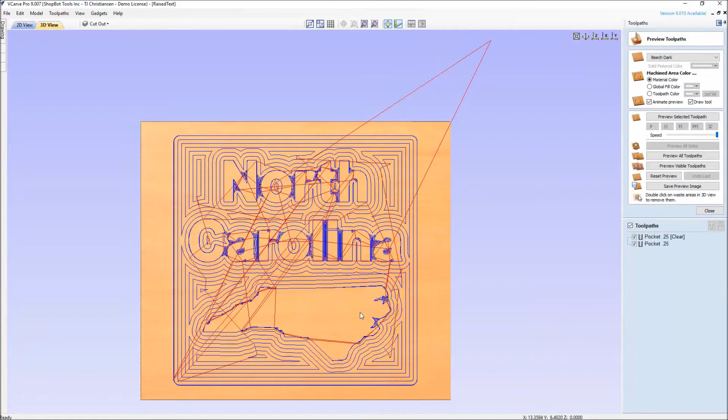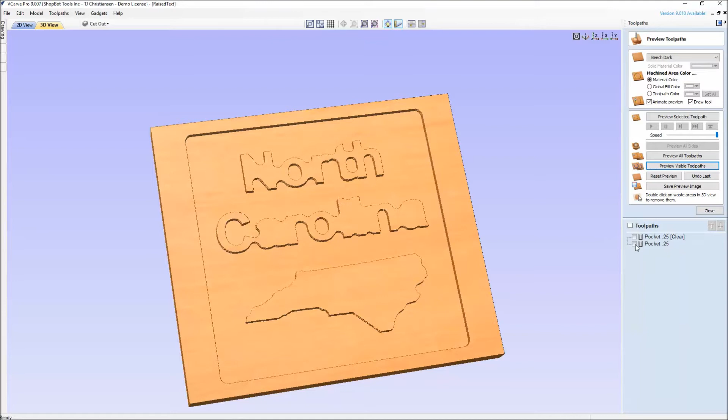0.25, so I know how deep it is. When I hit calculate and go into the preview, I can see there are 2 toolpaths generated. One is the clearance tool - if I turn that on and run it, you can see that big 1/2 inch bit will go and clean all these large areas out, staying outside the finished detail. Then when you put in your smaller 1/8 inch bit and do your bit change, that's what goes in there and gets where that 1/2 inch bit couldn't fit, getting you the detail.

So let's take a look at this out on the ShopBot. Here we can see the type of hold down I was talking about, where I use the table saw and put a line around my blank, offset it by 2 inches, and just use whatever scrap material. These are just some fender washers to hold it down.

We'll revisit that later, but notice I put an X on the blank because I'm going to do bit changes. Not only is there an X on the blank, but there's also an X on the Z0 plate. So when I do the bit changes, I come back and zero in the same spot of the same material with the same part of the Z0 plate, which helps get rid of any discrepancies.

So here we are moving along with our 1/2 inch bit, which is going to auger out the material first. Remember, the 1/2 inch bit using the Vectric software stays away from the finished edge of the state of North Carolina, stays away from the finished edge of the text, and it's just working its way through here.

So what we can see here is it picked up, it's moved over, and it's still working its way through the cut. That's what's nice, this large area clearance tool is going around and clearing away the text. Yes, a V-carve would be a faster toolpath for certain types of signs, but with raised text, it's going to take a while to take the bulk of the material away, and that's why that feature is in there, for removing a lot of material first.

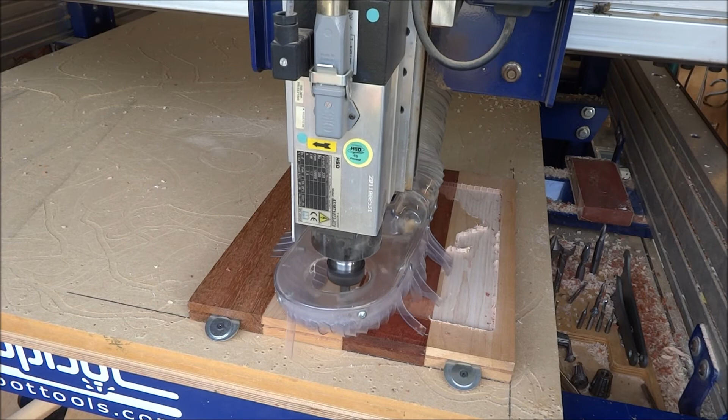As it carves itself out, you can see where I had the dust collector boot off, and I've returned it back on for the remaining part of this video because it does a much better job not throwing dust all over your shop. So it was off there for the first few passes, I put it back on, and then that's going to show you what it does. So it makes its final pass around, doing its cleanup.

And then this is the part where we stop it, and this is where we look at the bit change for the 1/8 inch bit. So here's showing you the size difference between the 1/2 inch and the 1/8 inch. The 1/8 inch is clearly needed to get down in between those letters.

Same X, new bit put in place, zeroing it in the same spot on the Z0 plate. What's nice is since we're using 2 different end mills going to the same depth, by zeroing it in the same spot, I don't have to worry about having a different deviation in cut depth when trying to align the 2 different toolpath depths.

So now that little 1/8 inch bit will get down in between the letters and works itself in there. Again, the dust boot is off in this video so you can see, but that little bit is what goes in and does the detail. The larger clearance tool is what cleared away that big bulk of the material around that. And when this finishes here, we'll go back to the VCarve software to start the next toolpath.

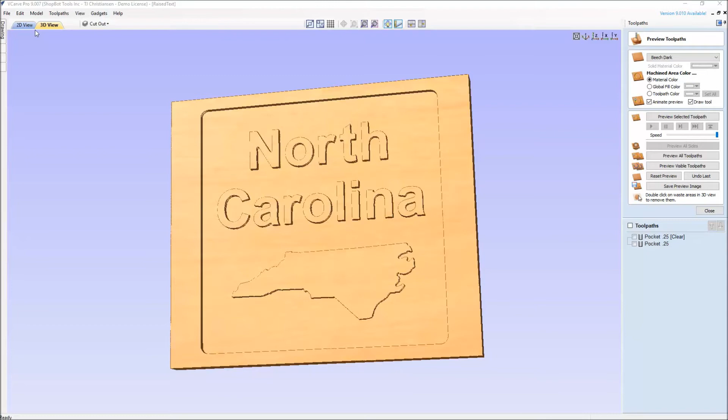Okay, we're back in the software, so we'll click up here to go to 2D view and hit close to come out of preview toolpaths. And here's where we are. Let me zoom out and we're back to setting up.

So we're going to add our V90 next. That V90 is what we're going to use to carve out ShopBot. I also want to put a beveled edge around all of our raised text just so it doesn't have the square corner. So first things first is our VCarve toolpath.

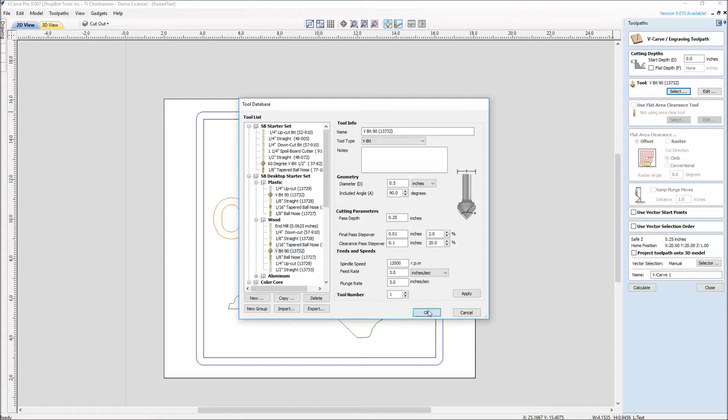We're just going to go in and select a V90 that's out of wood. Again, our settings are just a little bit different between wood and plastic, and you can look at tool database tutorials for that. Here's where you can see the word ShopBot as our visible. It's carved down in place.

And to give our raised text just a little bit of a beveled edge, I choose to go in this time and do a prism toolpath. Instead of a full prism, I'm going to restrict its depth and say, hey, I only want you to go down about 1/8 of an inch. Select the bit - I'm going to use the same bit so I don't have to do a bit change. I'm going to hit calculate.

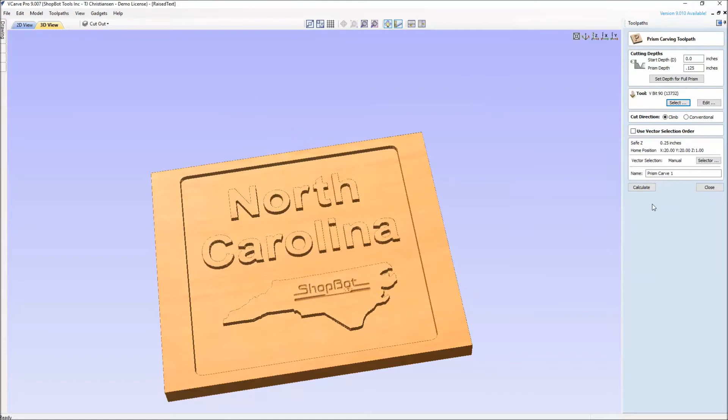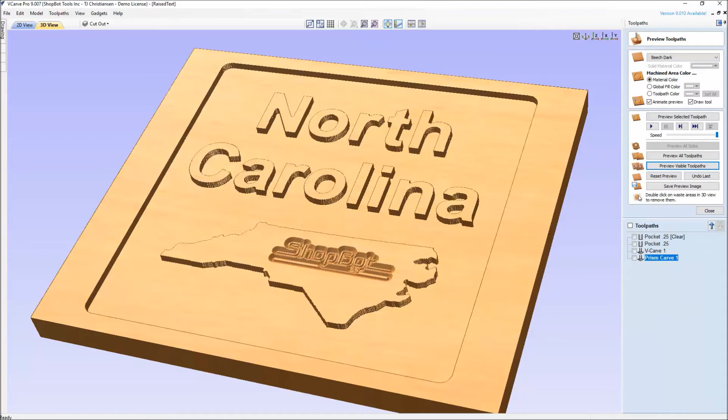And what it's doing here, and this is something that allows us to see, is, oh no, what's going on? Well, what we have here is something that happens to a lot of people when they're getting started. I was trying to do my prism toolpath over here on the word North Carolina, and what happened was, when I started my new toolpath, the vectors that were selected were the same ones from the previous toolpath creation. So instead of going in here and deleting this and starting a new one, what a lot of people overlook is you could just double click on the toolpath that you set up, and instead of that being selected, you grab the vectors that you want to work with.

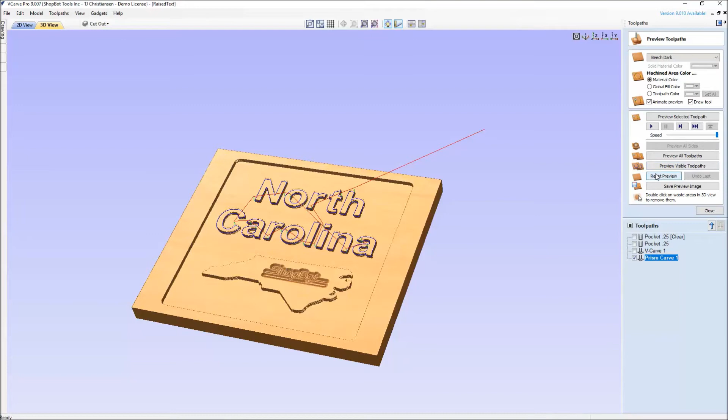And then when you hit calculate, it's pretty much asking us that we're not reaching full prism toolpath, and do you want to continue, which is what we do. We don't need to see this anymore, so we would reset the preview, and then we can preview all the toolpaths up to this point, and that shows us what this looks like having that depth. So it's a raised text, and using the prism toolpath, you don't have to go in and do any offsetting. It figures this out for you, puts a nice beveled edge on there.

And if I wanted that beveled edge to be on the state of North Carolina as well, again, I don't need to come back in here and create a new prism toolpath.

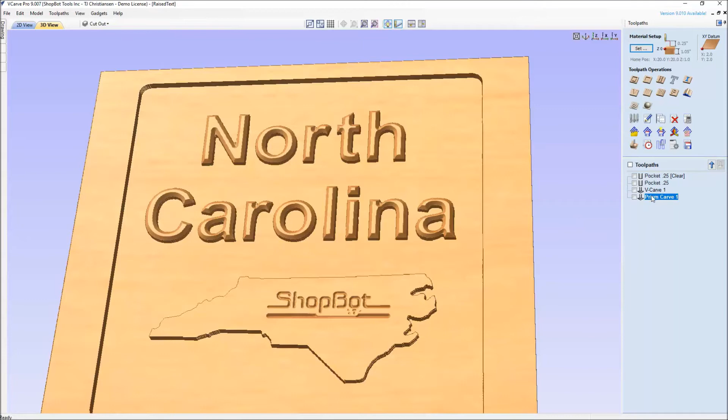If I'm using the same bit, same depth, same parameters, I'm just going to double click on the one I've already created and hold the shift key down and select that. I point this out because a lot of people who come through ShopBot training here in Durham, North Carolina will see Prism 1, Prism 2, Prism 3, because they add separate ones. I like to point out that you can add this all to one, and I'm even going to put in here Prism V90. It can all be done in one toolpath by reselecting and adding the same toolpath instead of having multiple ones, which keeps things cleaner. Again, personal preference—there's no right or wrong, it's what works for you.

So there we've added a beveled edge to our ShopBot state of North Carolina as well as our text. Let's go and look at what the V90 looks like added to our project.

Here we are at our third bit, but we're using the same zero location by using the X we marked on the Z0 plate. What's going to happen is determined by the order of the toolpaths and the way we created and saved them. If we wanted them in the other direction, doing the beveling first, we'd just change that back in the software. Here we're doing the V-carving. The toolpath moves out of the way, comes back in, and starts doing the prism toolpath that we set the V90 to go around at 1/8 of an inch.

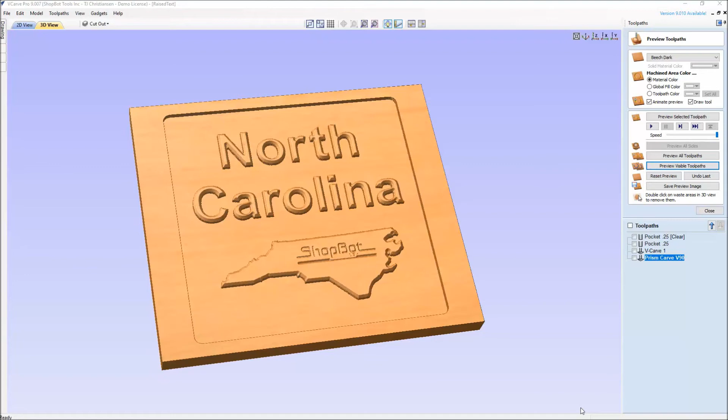Alright, our final toolpath is the cutout. Let me go back to the 2D view and close out of here. Remember, this outer vector in blue was the size we pocketed to, which was larger than our original 12 by 12 square. The reason was so we had it pocketed out past, giving us a flat edge all the way out past our actual cutout. So we want to make sure we grab the 12 by 12 square before we go into our profile.

For this example, I'd like to go by material thickness plus 20 thousandths to go a little bit deeper. That takes it to 1.07. For this one, I use the 3/8 compression bit, and I want to cut on the outside of the line.

Again, going through this, you're just seeing us in this tutorial selecting these different options for those of you just getting started. There are lots of tutorials on our website and through Vectric's website showing the different setups for profile, pocketing, and different toolpaths. But I'm going to walk this one down as outside, climb cut, and I like to add a nice healthy ramp to it, which will ramp itself all the way around in that harder material. I'll call this one the cutout.

When I calculate that, it says no vector selected. So you need to make sure you select not only a vector, but the correct one. Remember, the outside one is where we pocketed, the inside one is our 12 by 12.

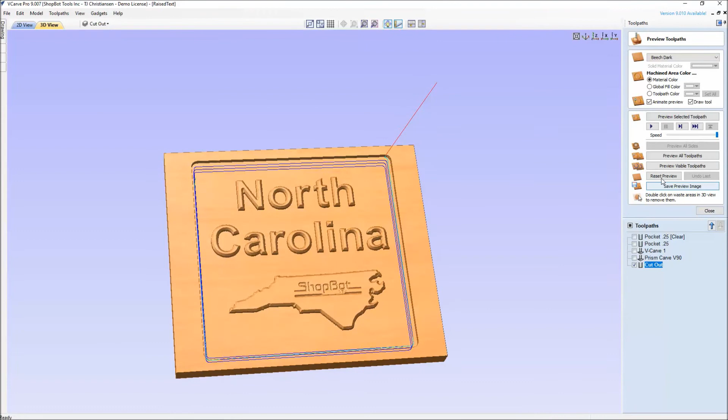When I hit preview here to preview this visible toolpath, I can see that it cut all the way through. If you need to add your tabs, you can go back into your cutout and do that.

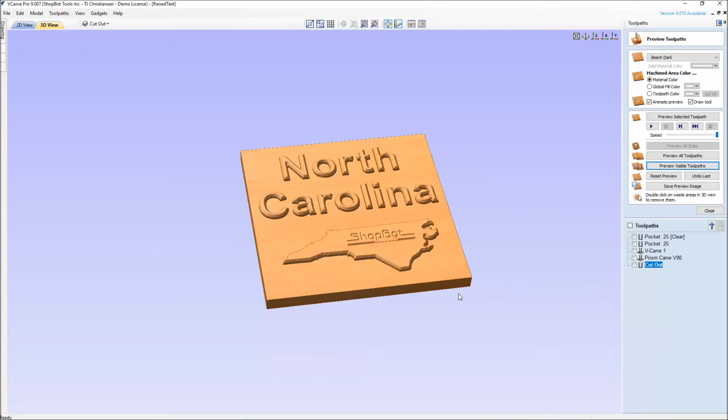So let's cut this one out so we can see it on the ShopBot, and then we'll come back and just finalize in the software. Just a few tips and tricks to remember. But also here, I just want to leave the tabs off so you can see that it is beveled, it is pocketed all the way down. And when I double click on the scrap material, it goes away, and I can see what my final sign will look like. There's my raised text with a beveled edge.

And let's go out and finish this cut. The fourth and final time we do our bit change. Again, same X, same location. This is just our profile cutout using that ramp, which augers itself down into the hard material. It does its 3 passes that go around. Adding tabs is going to keep that from moving out of there. And again, this hold down method worked as far as keeping it held to the spoil board.

I pulled my piece out, and there you can see a little bit of sanding, a little bit of finishing, cleans up, makes a real nice sign. Let's look at the drawing software one more time before we wrap this tutorial up. So a few things to take into account is you see on here what the ShopBot's going to do. There's a great preview, but you still need to remember what type of material it is that you're working with.

I glanced over this when we set up the pocket toolpath. If I actually go back in there and look, initially you don't see it so much on the preview finish, but you do see it in the preview when the toolpath is turned on. This is set as an offset because whoever used this software last sat down at this computer, this is the type of cut that they did. Well, if we look back here at the material, the grain is all running horizontally, along our x-axis. So I'd actually get a lot better cut direction if I was to change this from offset to raster. So currently it was as an offset.

If I would have been checking my work, I would have watched the toolpath in the preview going back and forth. I would have seen the direction that it was cutting and said, oh no, I wanted this to actually go back and forth with the grain. So I could come back in here and change that to a raster where it rasters back and forth. And again, not only do you change the type of cut, you can change the direction of the cut. So keep that in mind too. Know the material that you're working with.

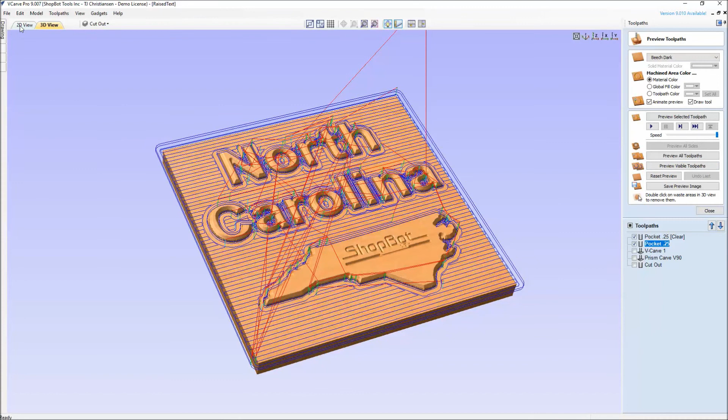Alright, another thing that people will notice with this tutorial is the start point, which is back here out of the way, instead of the bottom left corner where your 0, 0 is. That's set up here underneath material setup, where I changed the home/start position, which would be the same as the ending, to have the machine go to 20, 20. So as soon as it's done cutting, instead of going by default back to 0, 0, where I'd have to use the keypad and move it around, I just set the default to 20, 20 so it would move itself out of the way. And the reason why is convenience. For me, it was photography of the video. So that's just a personal preference of setting up the home/start position.

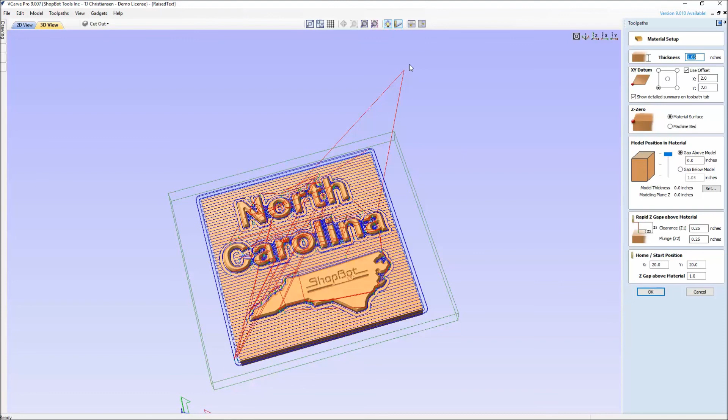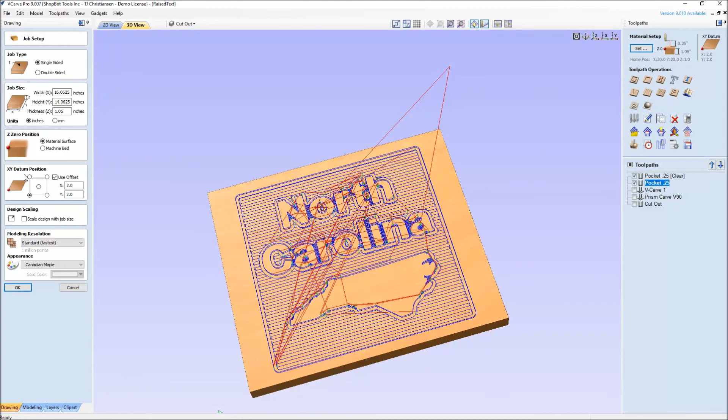So as you're working through the software, both on the drawing and the toolpathing side, you're going to start finding tips and tricks that work for you. Know your material, know what you're working with, know your ShopBot, the size of your machine. Notice that when I put the offset in way back at the beginning for the XY datum position, I marked that in from my X over and up. I could have left that off with no offset in this software, and then just on my ShopBot itself made a temporary 0, 0. So start playing around with these different things as you're working through these projects.

And for someone that hasn't done any raised text, take this file, take this tutorial, and just kind of mock up, even just on a scrap piece of MDF material, and walk through the steps of using a pocket toolpath and using the prism carve toolpath to put a little beveled edge on there, and try your shot at a raised text sign, because they really are a lot different than just a standard V-carve, and they really are neat in their own way.